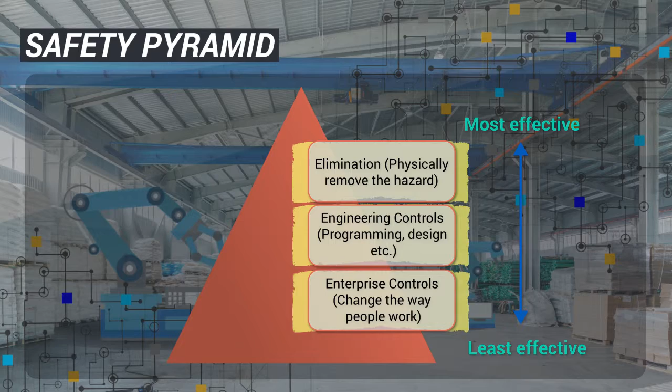Several continually emerging robot safety standards provide the framework to enhance safety. ISO 10218-1:2011, Part 1, talks about the safety essentials for industrial robots. It addresses robot manufacturers. The standard evolved from the 2006 edition and includes the concept of risk assessment at the application level. ISO 10218-2:2011, Part 2, incorporates the safety requirements at the integrator level.

The ISO TS 15066-2016 builds upon the two mentioned standards and provides safety requirements for collaborative industrial robots. Although this technical standard primarily targets collaborative industrial robots, there is a cross-transfer of knowledge applicable to traditional industrial robots.

The Robotic Industries Association, RIA, put together a technical report in 2016, the RIA TR R15.606-2016. The report enhances the safety of personnel with collaborative industrial robot systems and represents the primary focus of the course. Although a technical report, it's continually improving and is expected to mature into a standard by early 2020.

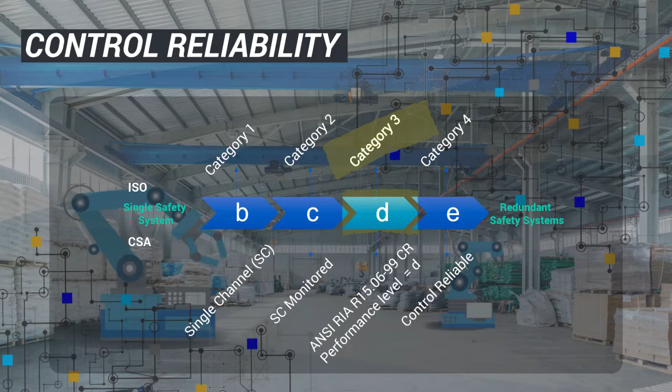At this point, it will be helpful to understand what distinguishes a collaborative robot from a non-collaborative robot. Traditionally, an industrial robot would exclude operator access to the operations area while the robot is still active. A robot is usually protected with a fence around it to prevent human interference.

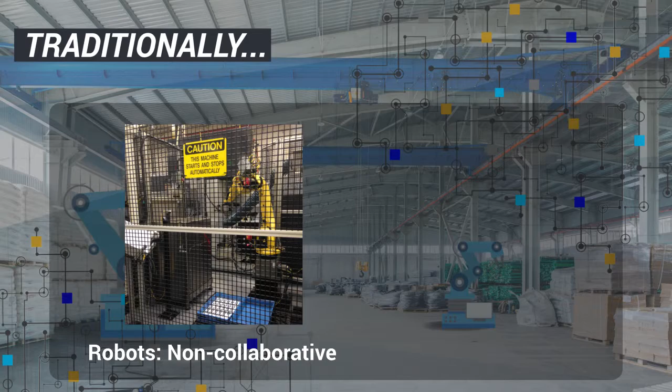Now, in an instance where an operator does enter the cell without hitting the stop button or in the absence of a presence detector, the robot can cause harm to the operator since this does not come to a protective stop. On the other hand...

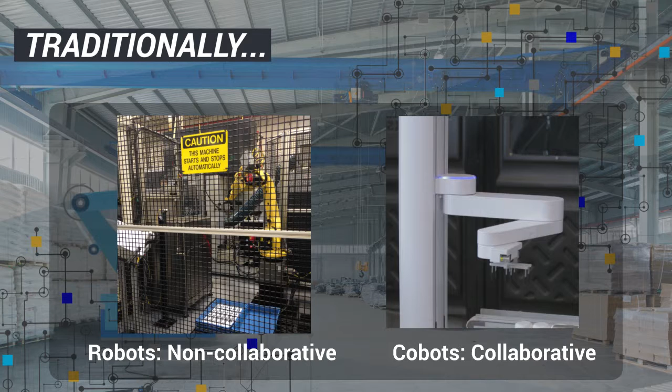Collaborative robots have inherent safety features that can detect a threshold contact force and can instantly stop. In these collaborative workspaces, robots exhibit precision and power, and humans can solve imprecise problems. Such a collaborative application finally affords robots and humans to share the same workspace.

We introduced the critical difference between a collaborative and non-collaborative operation. Let's dig deeper into different kinds of operation based on a function of time and distance between the operator and a robot. This foundation of different kinds of operations will be beneficial as we progress through different facets of the course. This understanding will help you recognize and design the type of operations that you would like to incorporate in your application. The three types of robot operations are coexistence, cooperation, and collaboration.

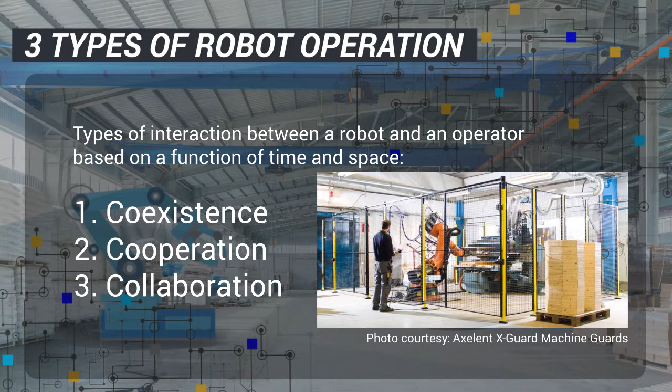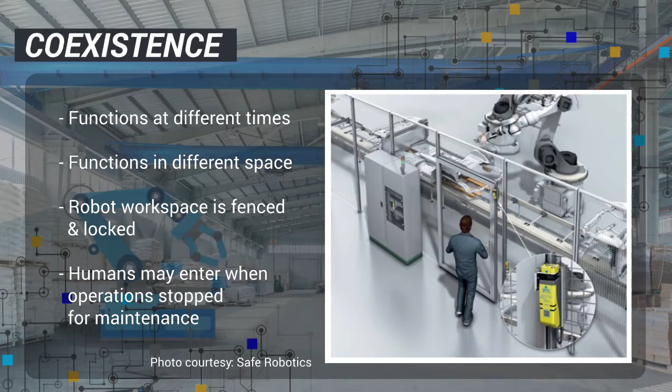In a coexistence type of operation, a robot and an operator function at different times and in separate workspaces. A protective fence surrounds the robot and access doors are locked. This fence prevents human access while the robot operation is active. However, an operator may stop the robot operation and enter for required maintenance in industrial robots.

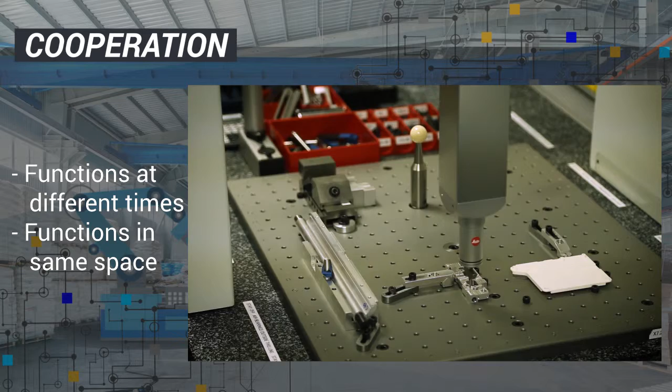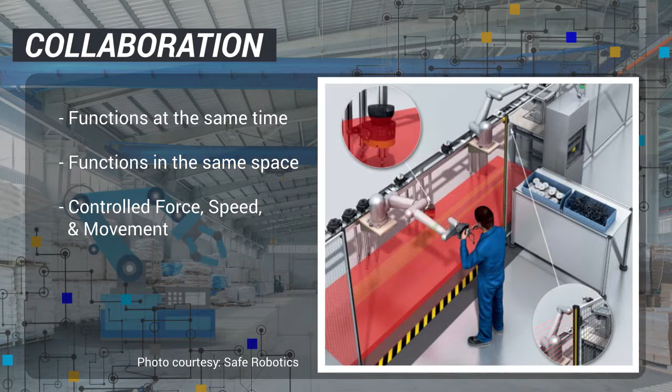Now on to a final type of operation, the collaborative operation. In this type, an operator and a robot perform tasks within the same workspace. Unlike cooperative, a collaborative operation is realized at the same work time. The collaborative activity is an evolution in the world of robotics and represents a primary focus for the course. Since an operator and a robot work in such proximity, the three factors, that is, force, speed, and path of the robot, must be controlled or restricted.

Now that we've established our fundamentals, let's take a look at the robot industry evolution. We'll also transfer knowledge from industrial robots to collaborative robots.